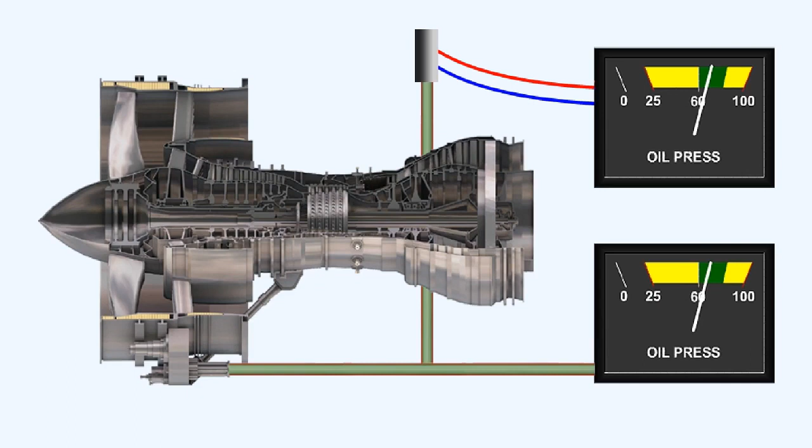A remote indicating system uses a remotely positioned sensing element, which is connected to the pressure source. The sensing element translates the actual pressure reading into an electrical signal, then sends the signal via electrical wiring from its remote position to an instrument in the cockpit.

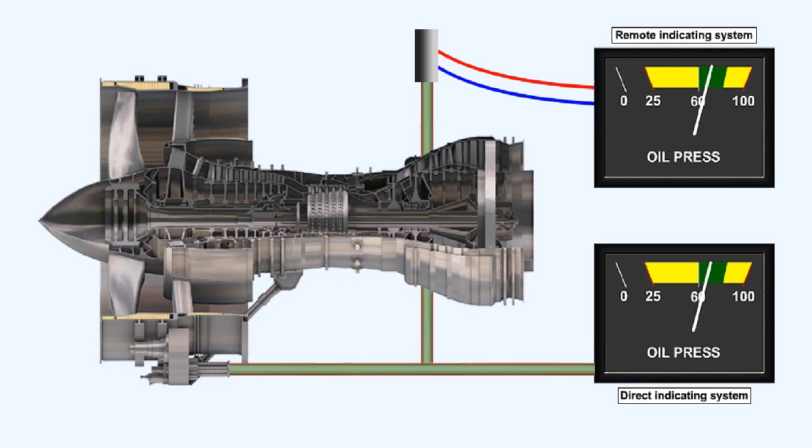A direct reading pressure instrument is physically connected to the source of the pressure that it's sensing. For instance, a direct reading engine oil pressure gauge will be connected via an oil pressure pipeline directly to the engine, to the point where the oil pressure is to be measured. Colored arcs of green, amber or red are used to indicate the range and limits of the pressure system.

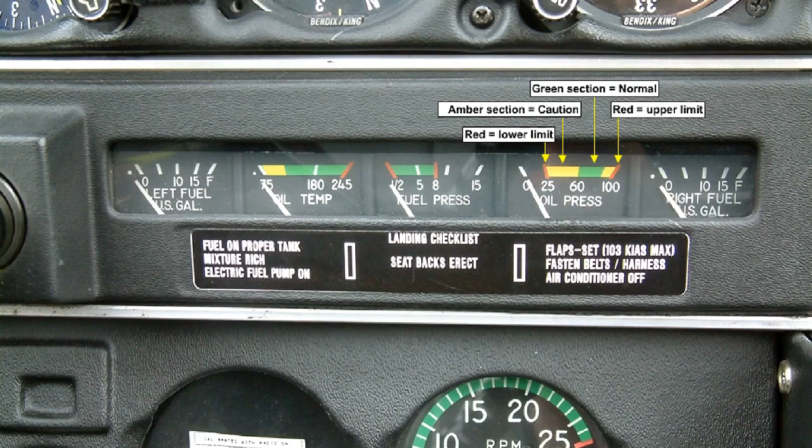Vibration monitoring equipment is fitted to almost all commercial jet engine aircraft. Although gas turbine engines have an extremely low vibration level, any change in that level is usually indicative of damage which may lead to failure.

Warnings will be given in the cockpit if the vibration levels are exceeded, and some systems have a continuous readout of vibration levels. Modern engines have the facility whereby the vibration level of each rotating assembly can be monitored, so that the source of any vibration can be pinpointed.

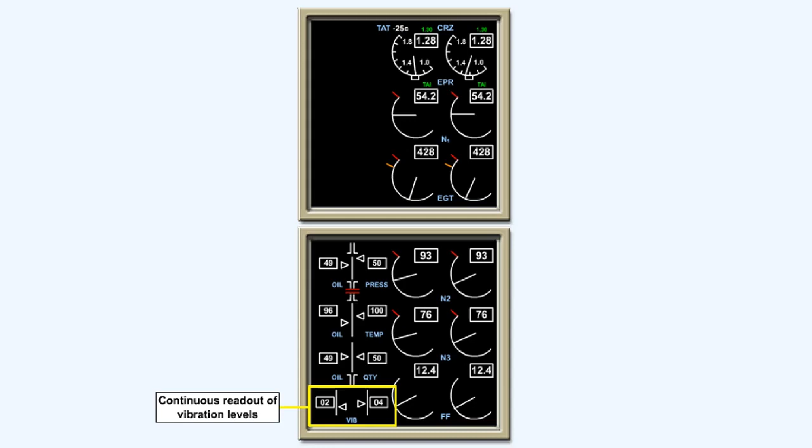The principle upon which vibration monitoring equipment works requires an input from a detector, which can be either a piezoelectrical crystal mounted strategically on the engine, or a fixed coil carrying 115 volts at 400 Hz, the output of which will be affected by the movement of a magnet within it, which is mounted on springs.

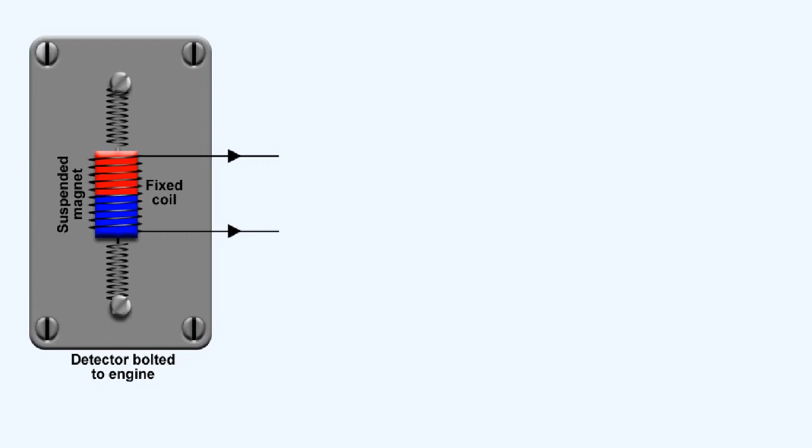In either case, the frequency of the incoming vibrations will be amplified, and then filtered so that only those frequencies that are indicative of damage occurring to the engine will affect the output.

The output of the detector will affect the current flowing through the coil into the amplifier and filter. The filter will erase any output which is normal to the engine, but allow through to the amplifier any frequency that's considered to be harmful to the engine.

The result of this amplification is sent to the instrument via the rectifier and warning circuit. The needle will show the appropriate deflection for the amount of vibration being suffered by the engine at that time. If the level of vibration exceeds a predetermined amount, a warning light on the instrument illuminates. Vibration is measured and displayed in relative amplitude.

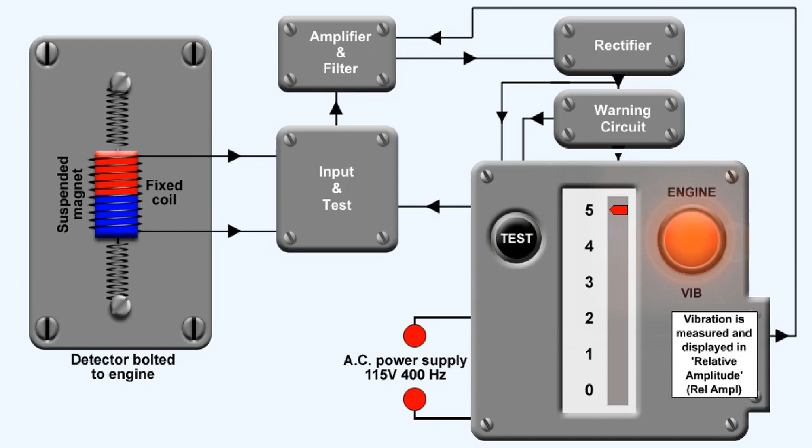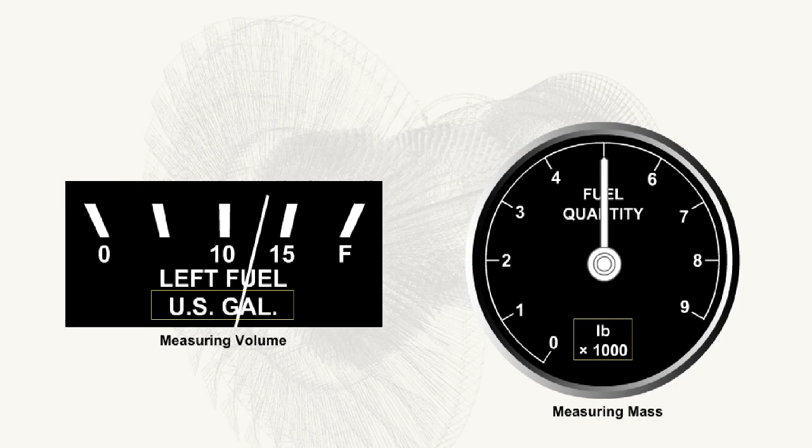There are two methods of indicating the quantity of fuel carried in an aircraft. Either the volume, for example gallons, or the mass, kilograms or pounds, are measured. Because the mass of the fuel on board is of more interest to the pilot of a large aircraft than is the volume of the fuel on board, measurement of the volume of fuel is now only used on light aircraft.

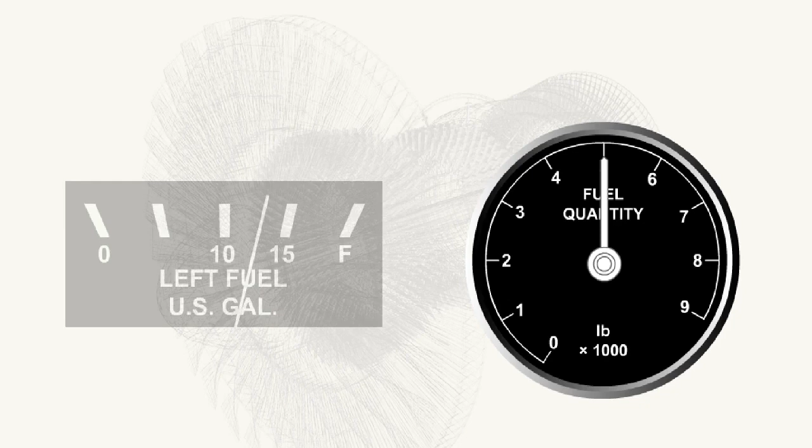The simplest form of volume indication is a float system. Early aircraft used a float which sat on the surface of the fuel in the tank. Attached to the float was a piece of wire that protruded out of the top of the fuel tank. As the fuel level reduced, so the wire disappeared from view.

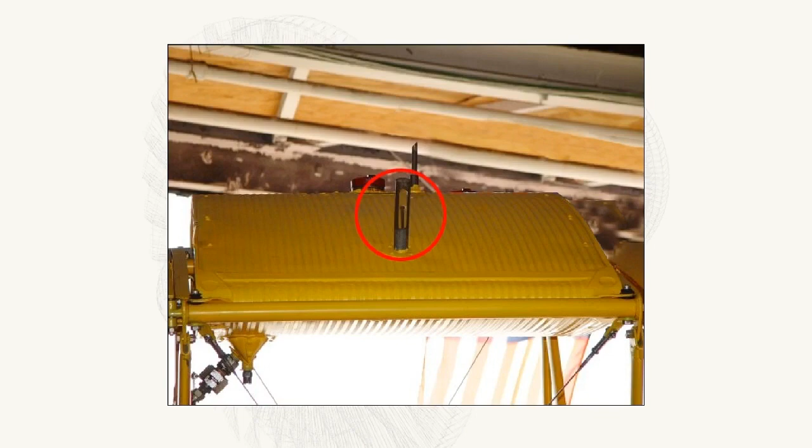A later system used the float to reposition a wiper on a variable resistor. This varied the current flowing to an indicator which had a pointer that moved over a scale calibrated in volume. The system was powered by direct current.

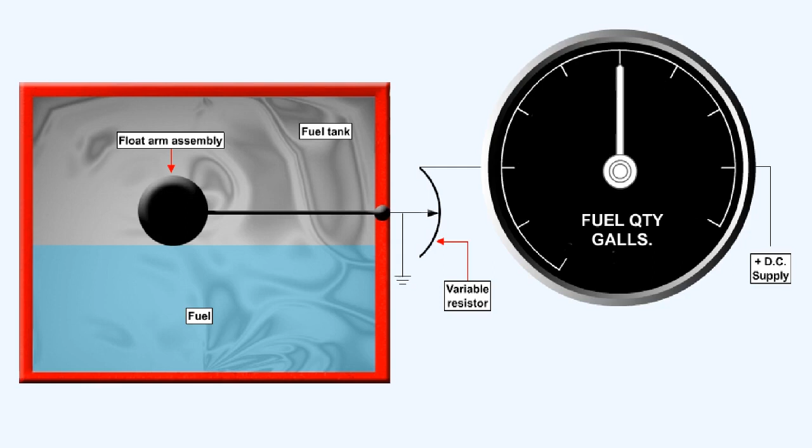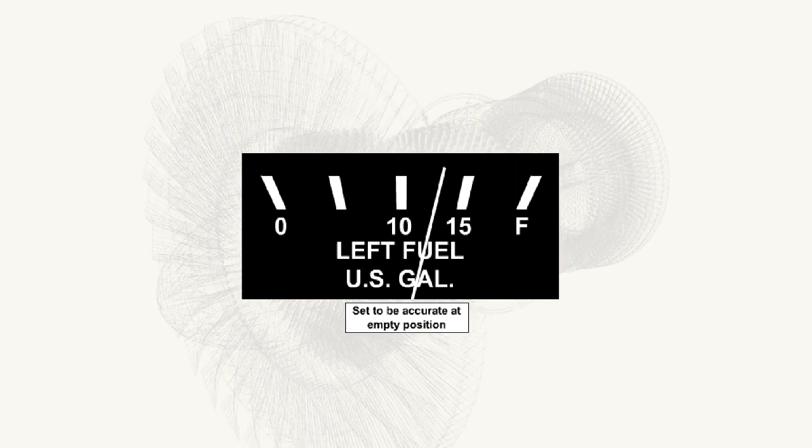The disadvantage of the float system is that the indication is not linear, and there is no provision for making adjustments for system accuracy. The gauge is set to be accurate at the low and empty positions. The system is also subject to errors caused by temperature changes, aircraft attitude changes, and aircraft acceleration.

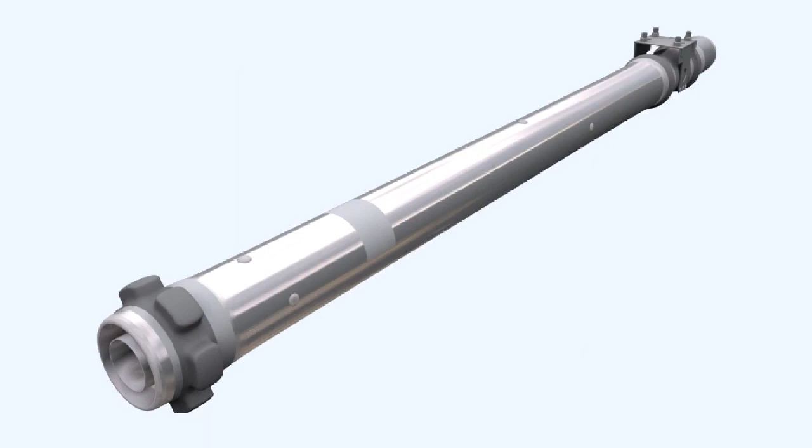In its basic form, a capacitance system, which is much more accurate than the float system, consists of a tank unit, which is effectively a variable capacitor, located in the fuel tank, together with an amplifier and an indicator. A tank unit consists of two concentric aluminium alloyed tubes, which are held apart by pairs of insulating pins. The coaxial electrical connections are insulated and the unit is insulated from the tank.

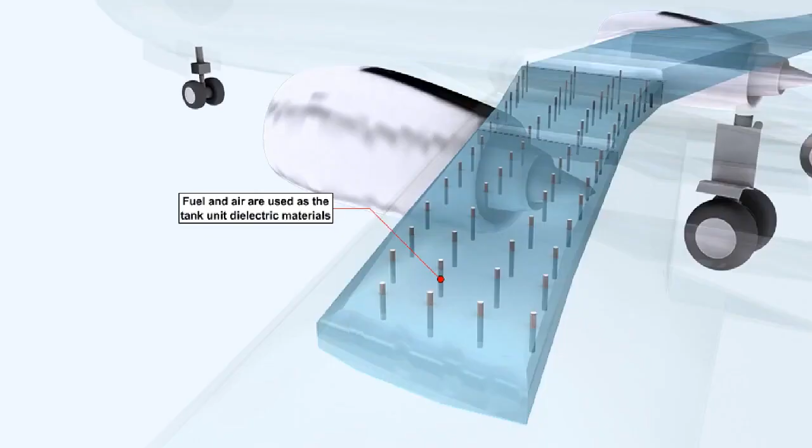The principle of operation of the capacitance system is based on the use of fuel and air as the dielectric between parallel plate capacitors, which have a fixed area and a fixed distance between them. The only variable in the system is the ratio of the dielectrics used, which are fuel and air. That ratio is determined by the quantity of fuel in the tank.

Incorporated in the system are reference units, which reduce indication errors that would occur if the dielectric constant of the fuel changes from its normal value, which is about twice that of air, and directly proportional to its density.

Reference units are located on the lower end of a tank unit, and are always totally submerged in the unusable fuel that remains in the tank. The circuit is compensated for changes in temperature, and will indicate the mass of the fuel in the tanks.

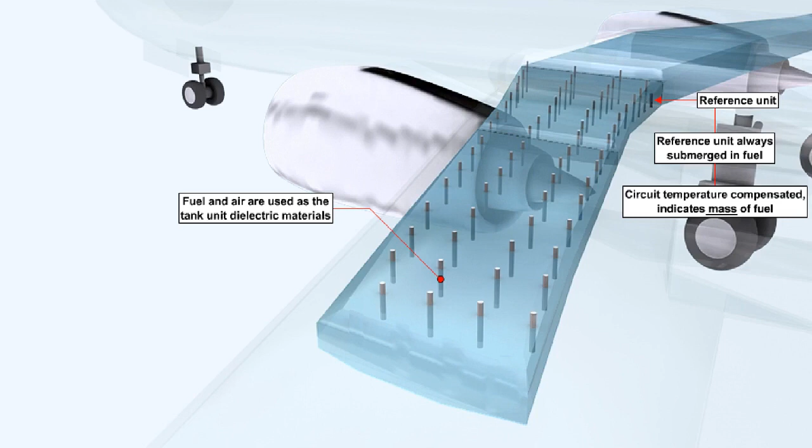Fuel gauging systems can incorporate an additional indicator known as the fuel totalizer, which can indicate the sum of all of the tank quantities.

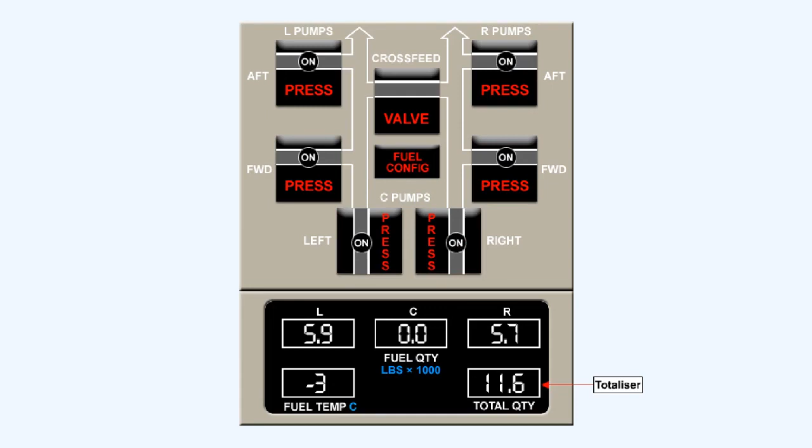In the event of a gauge failure, the fuel gauging system will fail safe and drive the needle of the failed indicator slowly to the 0 position.

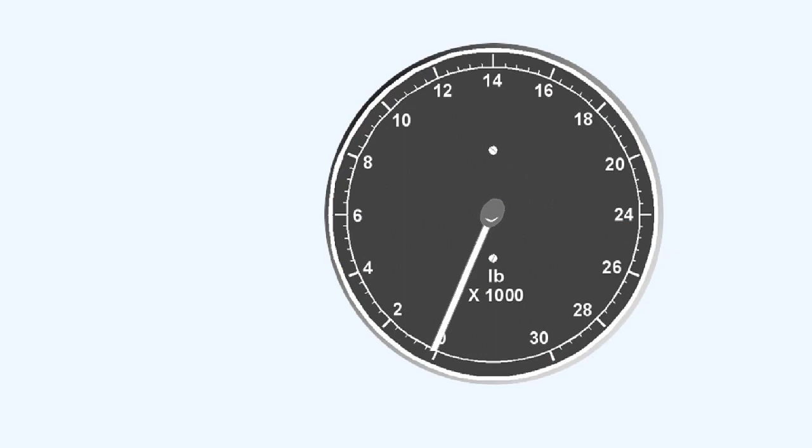A test circuit is incorporated, which will simulate gauge failure. Place your cursor over the test button to activate the test. When the test switch is released, the pointer should return to its original position.

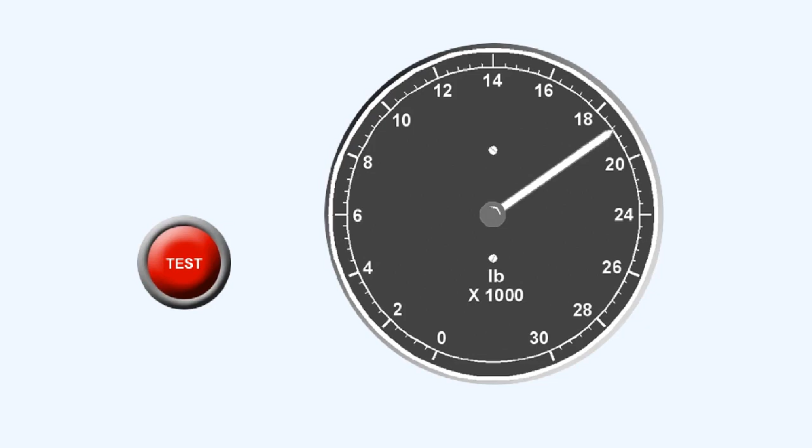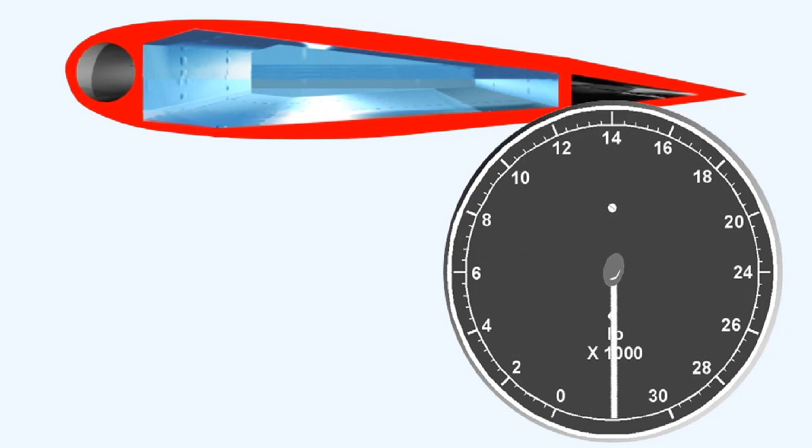If water is present in the fuel, it can cause errors in the indicating system. If the percentage of water is very large, the capacitors in the sensing units can be effectively shorted out. If this happens, the indicator needle will be driven beyond full scale.

As well as the quantity of fuel measured, the instantaneous fuel flow can be shown. To obtain the indication of total fuel used, the instantaneous fuel flow must be integrated.

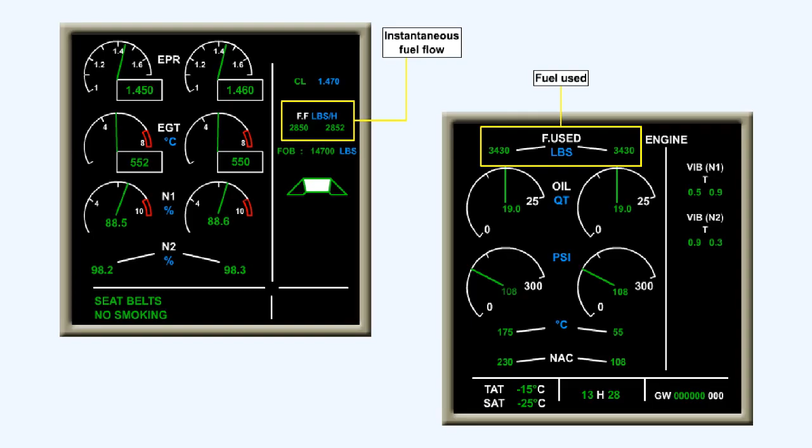The fuel flow meter can display either volume flow or mass flow. To indicate mass flow, the meter must be compensated for the density of the fuel.

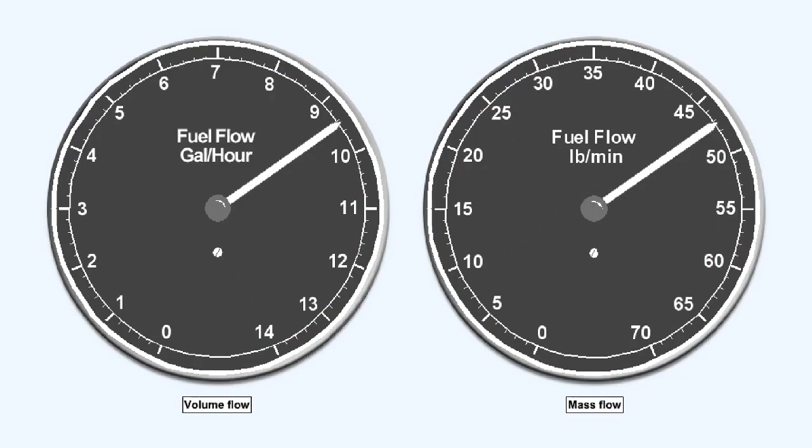A fuel pressure gauge can be adapted to be used as a simple flow meter. This system is used on many light piston engine injection systems.

Most gas turbine engines use an electrical sensor, which utilizes the change in either the torque output or the rotational speed of an impeller situated in the high-pressure fuel line to the fuel spray nozzles.

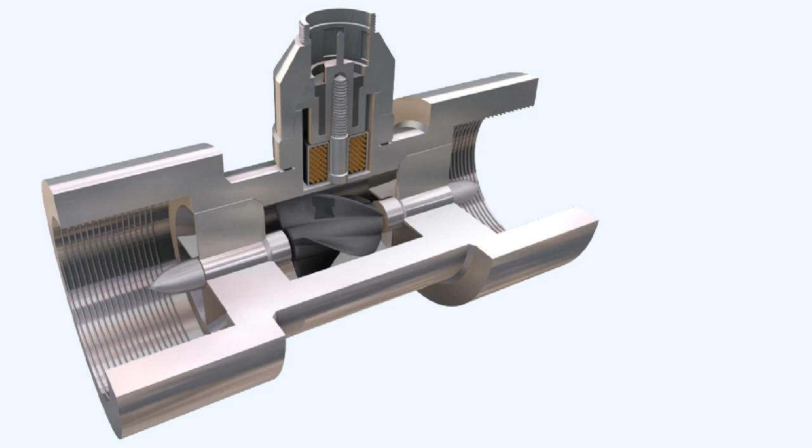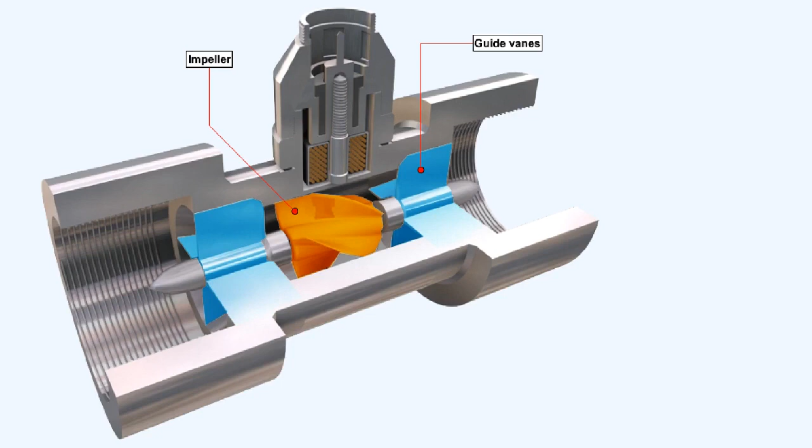This type of fuel flow meter consists of a cylindrical light alloy casting, within which are guide vanes that support the shaft of a helical vane impeller. The impeller has a magnet embedded in it.

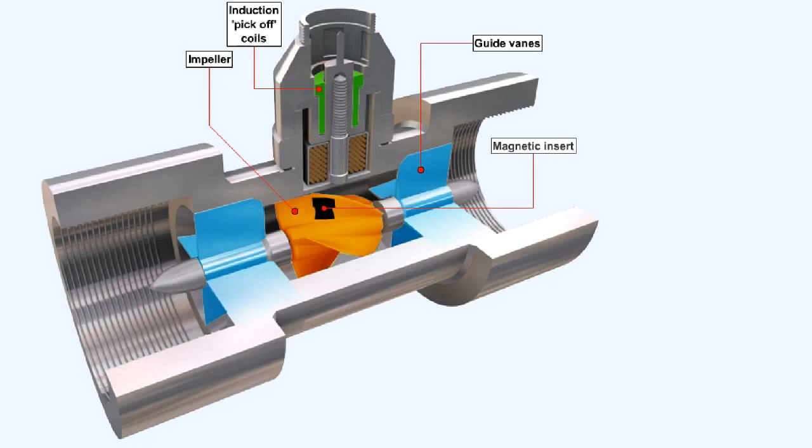Electrical pick-off coils are situated in the wall of the cylinder casting. When the fuel flow rotates the impeller, a sinusoidal signal is induced in the pick-off coils. The frequency of the sinusoidal signal is proportional to the speed of the rotor, which in turn is proportional to the rate of flow.

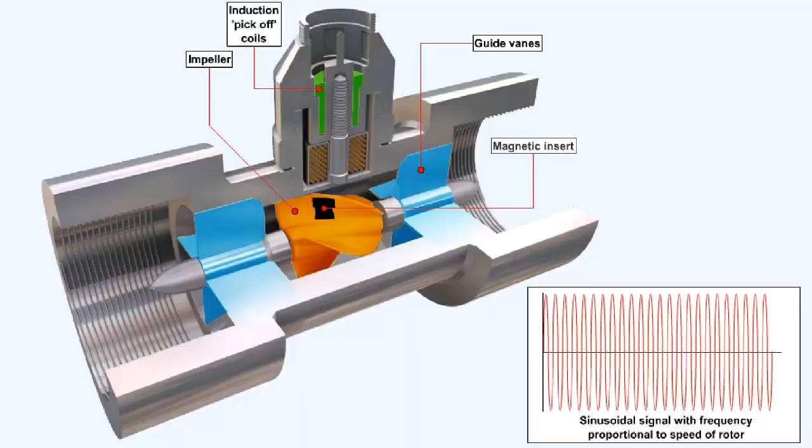The total consumption is obtained by integrating the rate of fuel consumption over time. A flow meter that displays fuel consumed as well as fuel flow is called an integrated flow meter.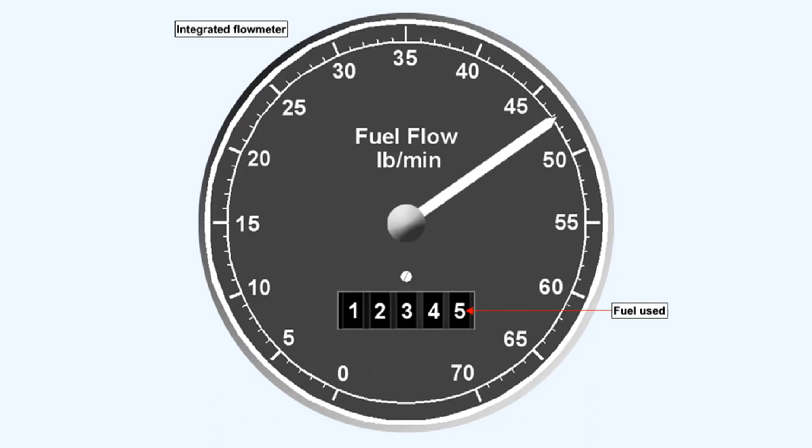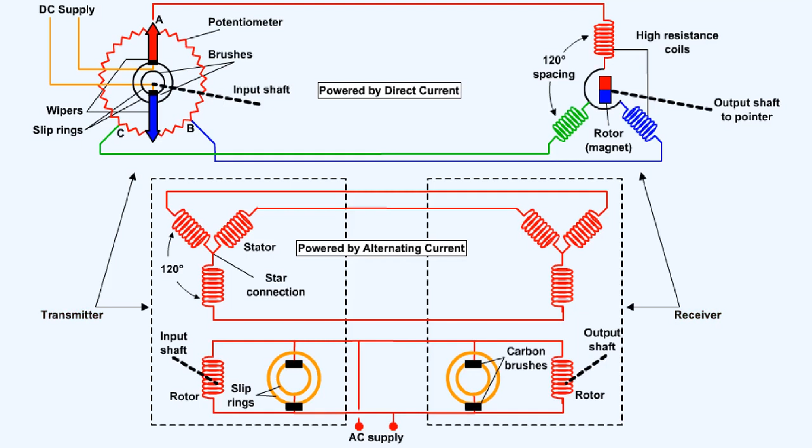Modern aircraft employ remote indicating systems that can be powered by either direct current or alternating current supplies. Whatever the power source, each data transmission system employs a remotely positioned transmitter located at the source of the information, and a receiver which responds to the information received.

The Desynn transmission system is a simple transmission system with low torque characteristics, which is used for the remote indication of angular position. It's often used where a simple pointer and scale is adequate, for example, remote indication of flap, rudder and elevator positions, or to repeat the reading of an instrument at a remote point.

The accuracy of the system is approximately plus or minus 2%.

The transmitter consists of a continuous resistance ring or potentiometer, which has three fixed tappings, A, B and C, spaced 120 degrees apart, which are connected to the receiver. The input shaft carries two diametrically opposed spring-loaded sliding contacts, or wipers, which are in contact with the potentiometer.

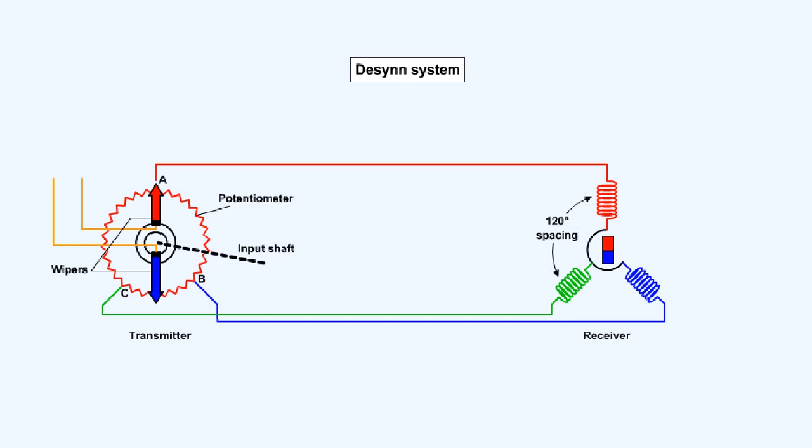The input shaft carries two diametrically opposed spring-loaded sliding contacts, or wipers, which are in contact with the potentiometer. The wipers are fed via slip rings and brushes with direct current.

The receiver consists of three high-resistance coils, whose axes are spaced 120 degrees apart, with a permanent magnet rotor pivoted at their center carrying a pointer shaft. The three coils are connected to the tapping points A, B and C in the transmitter.

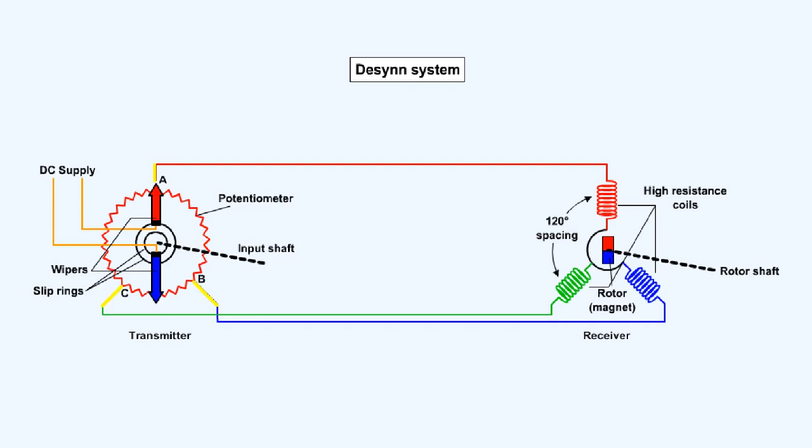When direct current is applied to the transmitter wipers, the voltages at the tapping points A, B and C produce a current flow in the three stators of the receiver, and the resultant magnetic field is produced. The rotor magnet aligns itself with this magnetic field.

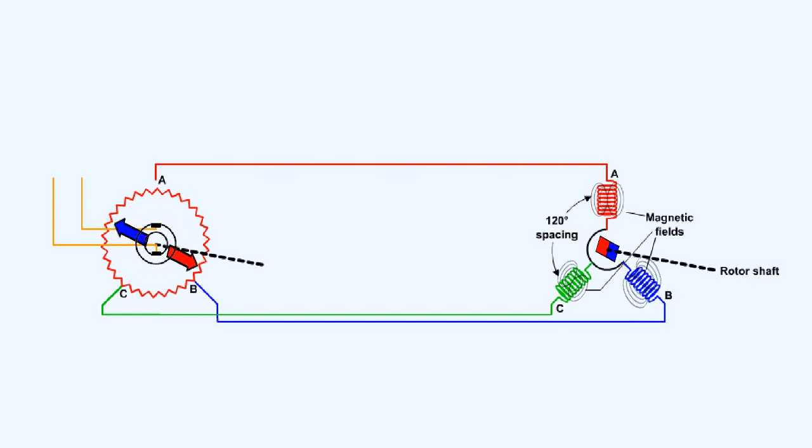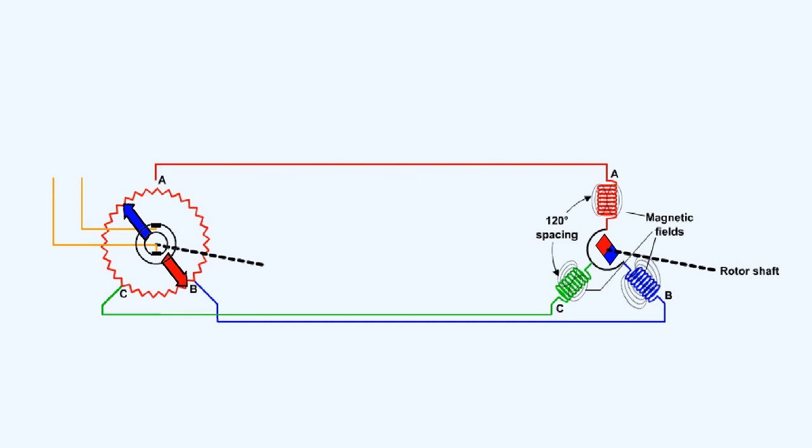The magnitude and polarity of each tapping point voltage varies according to the position of the wipers, and thus, if the input shaft is rotated, the change of voltages at A, B and C produces a variation in the current flowing in the stator coils, and rotation of the resultant magnetic field in sympathy with the rotation of the input shaft. The rotor magnet remains aligned with this field at all times, and so rotates in synchronism with the input shaft.

Here the voltage distribution around the potentiometer is such that point A is at plus 24 volts, while points B and C are both at plus 8 volts. Because the voltage at A differs from that at B and C by the same amount, current flows from A through coil A in the receiver, then divides equally at the star point, with half the total current flowing through coil B and half through coil C back to the transmitter. The resultant magnetic field in the receiver, with which the rotor magnet aligns itself, is compounded from the vectors representing the individual fields.

If the input shaft is rotated through 120 degrees in a clockwise direction, as shown here, the voltage distribution around the potentiometer is such that the current flows from B through coil B in the receiver, then divides equally to flow through coils A and C back to the transmitter. The vectors show that the resultant magnetic field also rotates through 120 degrees clockwise, and the rotor shaft aligns itself along this new axis.

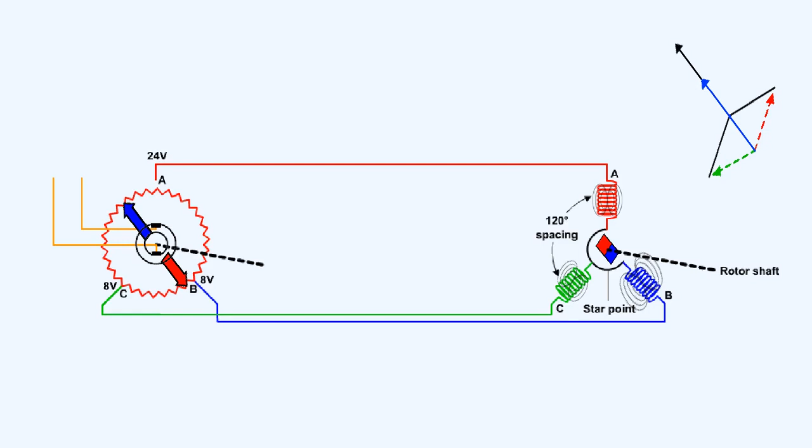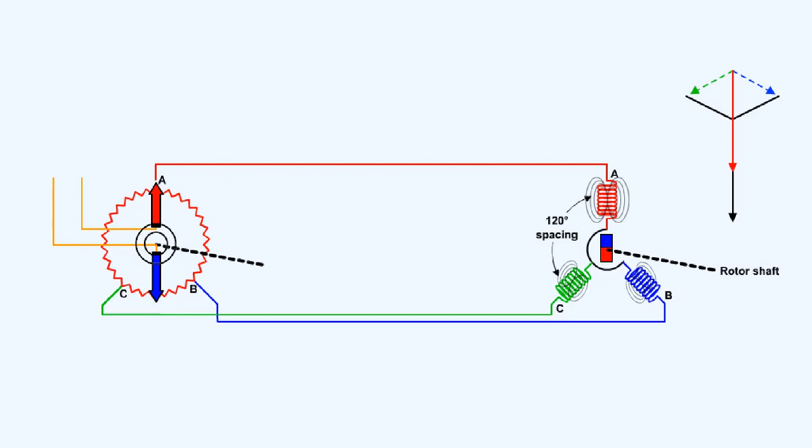Thus, if the wipers in the transmitter are placed in any position by the input shaft, the resultant field at the receiver, and hence the rotor magnet, takes up a corresponding position. If a pointer moving over a calibrated scale is attached to the rotor, remote indication of the position of the input shaft is immediately available.

The Desynn system has inherent errors caused by the wiper arm being in physical contact with the potentiometer. This causes inaccuracies due to friction and carbon contamination of the resistor.

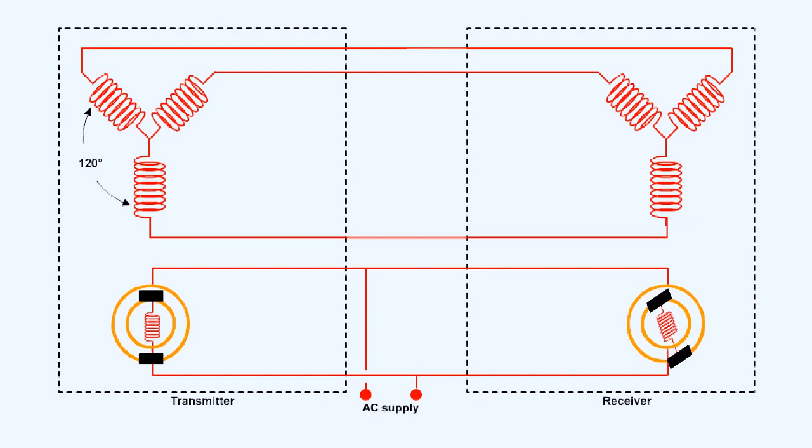The Selsyn was developed in 1925. Halfway through the Second World War, the Americans reinvented the Selsyn and called it the Synchro. The Selsyn is a system whereby a transmitter and a receiver, powered by alternating current, are electrically connected so that angular rotation of the rotor in the transmitter is reproduced simultaneously in the receiver.

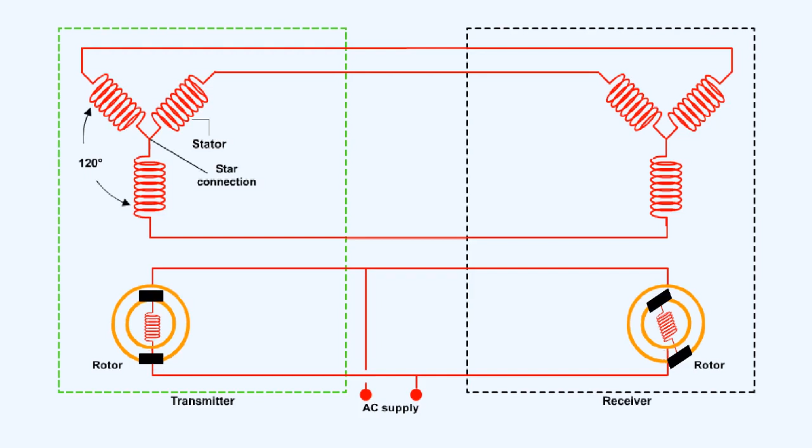The transmitter consists of a stator and a rotor. The stator has three electrical coils whose axes are 120 degrees apart. The three stator coils are star-connected. The rotor is mounted on a shaft and has one electrical winding, the two ends of which terminate in two slip rings. Carbon brushes feed power to the rotor through the two slip rings.

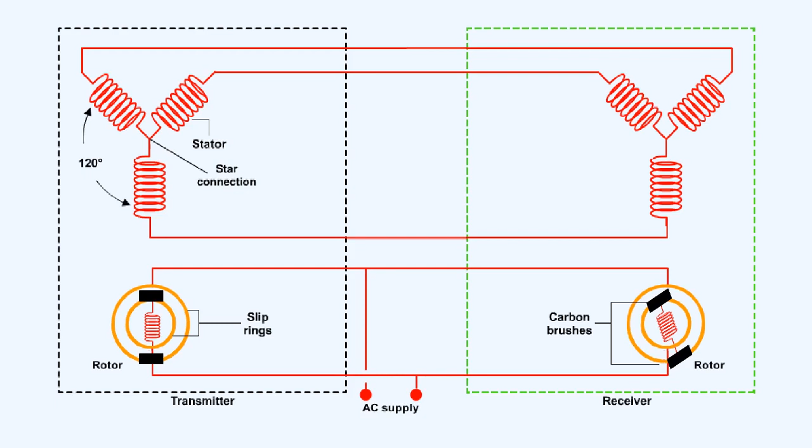The receiver is identical to the transmitter, and they are connected electrically to each other as shown here. The two rotors are supplied by alternating current from the same source. With power applied, both of the rotors will adopt the same position relative to their stators. The rotor of the transmitter can be attached to the output shaft of any device which needs positional information communicating to a remote position.

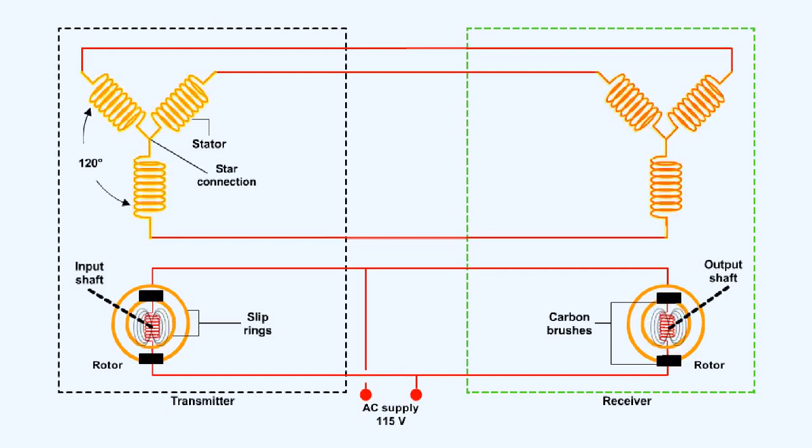The magnetic flux generated in the coil of the rotor interacts with the cores of the stator and causes a current to flow in their windings. Because the stator coils of the transmitter and receiver are in series with each other, the stator coils of the receiver now have a magnetic field around them which is identical to that around the stator coils in the transmitter. The rotor in the receiver aligns itself with the magnetic field which is formed in the receiver stator, adopting a position which is identical to that of the transmitter rotor.

The synchro system is more accurate than the Desynn system.

Some aircraft indicate and record usage of their engines in flight. The flight hour meter can be coupled to an airborne sensor which energizes it at certain airspeeds. The information obtained from the flight hour meter can be used to determine the time to run between engine servicing periods.